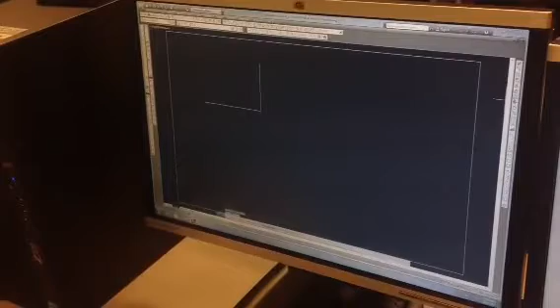Draw a line from here, ortho, 3.25. Then I'm going to draw a line up. I don't know how long it is, but I'm going to offset. What's the distance from one side to the other? 2.5.

Draw me a line from here to here. I can grip this one if I need to and pull it up and let it grip to the end point of that. Now, at the midpoint of this line, I've got a circle. I'm going to draw it in as a circle. It's really a radius.

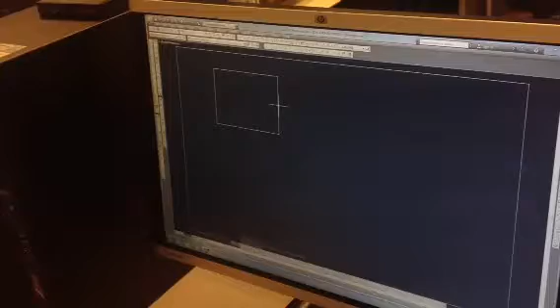Circle at the midpoint. Alright, that's my circle. Then I come over here and trim. Cut that off. I'm going to leave that in there because I might just convert that to a center line.

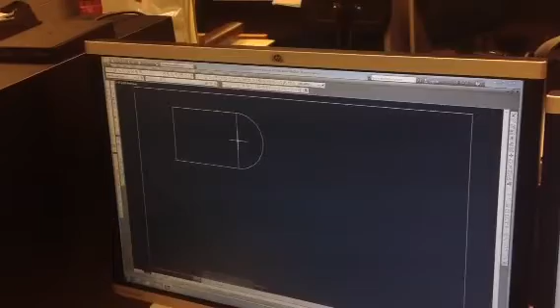Alright, now I'm going to come down here and draw some of my front view. So I'm going to draw me a line from here down. I'm going to go from the quadrant of this down. And I'm going to draw me a line just straight through here. Now, this is where my front view is going to be.

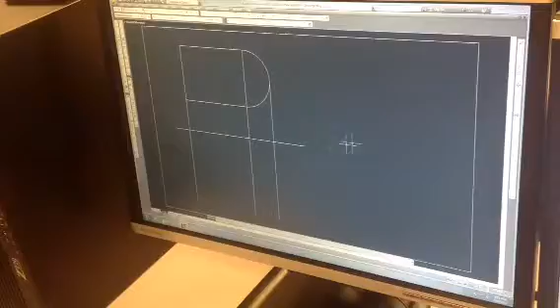And it's 1.75 high. So I'm going to offset 1.75. And then I'm going to trim. Get rid of that, and that.

Alright. Now let's see. I need a line from the top right here. How wide is that part right there? It's probably 0.5. If this little piece here is 0.5, that's probably 0.5. I'm going to offset 0.5.

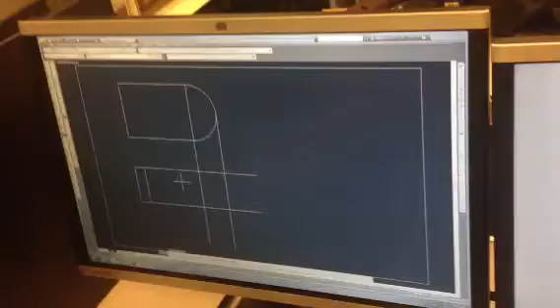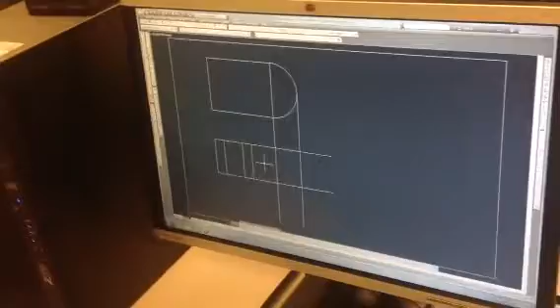And then, let's see. From this vertical line to this vertical line is 2 inches. So I'm going to come here and offset 2. Then I'm going to offset this back 0.5. Okay, it'll all fall into place. Now I'm going to offset the bottom line up 0.75 to get the bottom part of that.

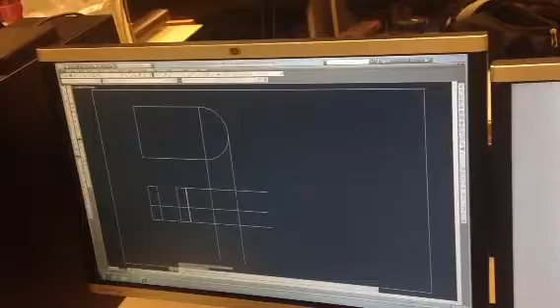Now I'm going to trim some. I need to get rid of this piece right here. I need to get rid of this piece. I need to get rid of this piece and this piece. And these two. Okay? That's that section right down there. That's what it's going to look like.

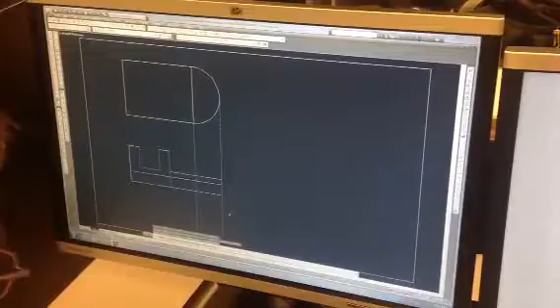Now this bottom, this end piece down here with the circle in it is only a 1/2 inch thick. So I'm going to offset 0.5. Then I'm going to come back and trim. I'll go ahead and get rid of that, and that, and that.

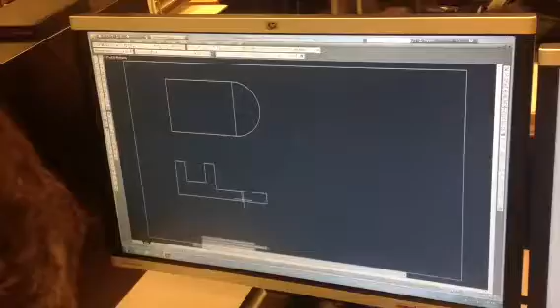Then erase this. Don't need that. And don't need that. Okay? Now I'm going to erase this. That's basically what the front view is going to look like.

Then you can come here, transfer these lines up, just drawing lines, trim, get rid of these and these.

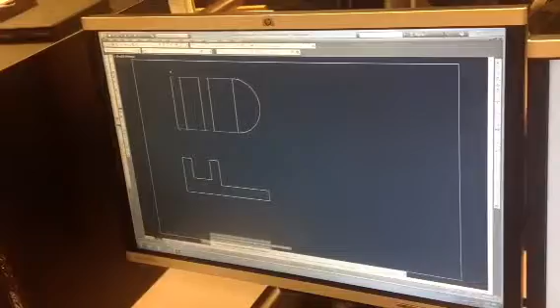Now, the width of this little piece here is 0.5, and then it's 1.5 inches. So I'm going to offset 0.5, and then 1.5, then start trimming again.

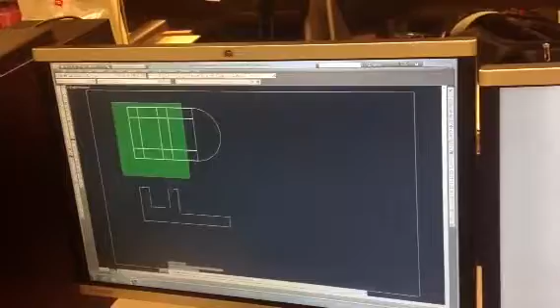Let's see, I don't need that or that. Got to have that, got to have that. Don't need that or that. Okay, that's basically what the top is going to look like.

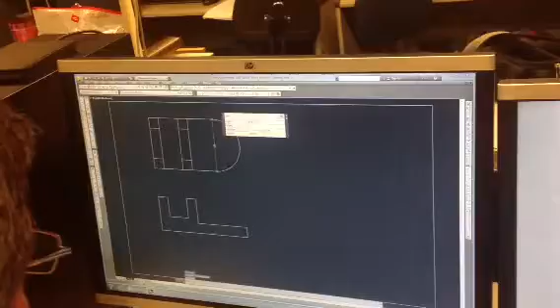I'm going to double click this and go ahead and make it a center line. Should be a center layer, right? Match properties. Well, no, that ain't what I want to do.

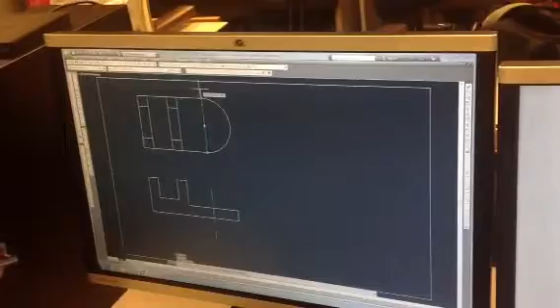I'm going to copy. I'm going to need a center line here. This center line's got to come outside, so I'm going to grip these and pull them out. I also need another center line that direction.

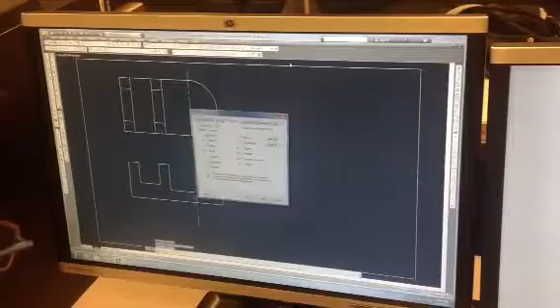Pull a line from the center. Alright, see, that's not snapping to center, is it? Type in O snap. Alright. End point I want, center is supposed to be there.

I don't want extension, I want intersection. Those are the ones I use. End point, probably midpoint, center, and intersection. And say okay. Now, I'm going to draw me a line from,

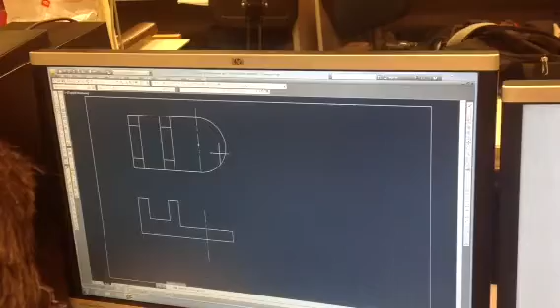well, it ain't going to jump to the center. I can make it jump to the center. Okay? I'm going to grip this. Match properties with this. Now I've got center lines.

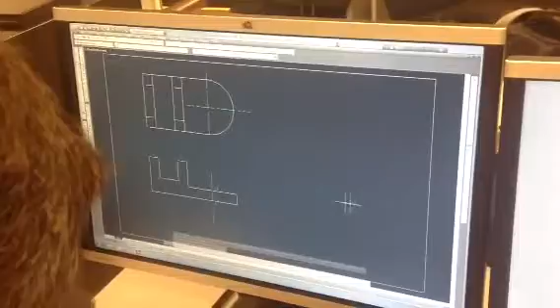Now, I got to get something over my right side view. So I can draw my lines, just transfer these over with lines. I need to get my width over here.

Alright, pay attention. I'm going to draw me a line from the bottom part of this view, and I'm going to start my right side view right along here and go this direction. So I'm going to draw me a line.

Alright, and where those two intersect, I'm going to draw me a line at 45. Shift 2, let's draw it about at an angle of 45 degrees.

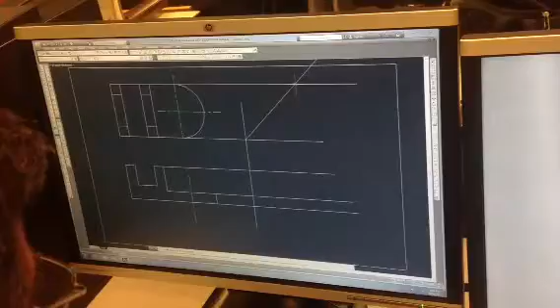Okay? Now I'm going to draw lines from here over and a line from here down. That's the width of my right side view. Okay? Just like that. You can draw me a line from here over, here. You go from this intersection down.

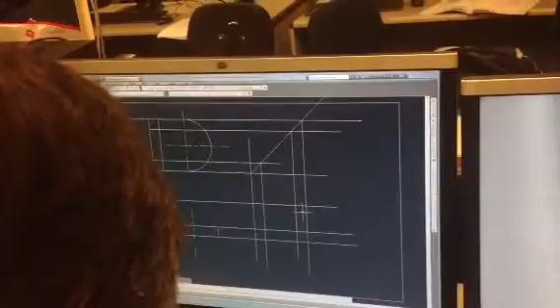Now the height of these pieces right here is the same height right here, so I'm going to trim, get rid of these. They won't go to the bottoms, so I can get rid of those. Get rid of that, and get rid of that.

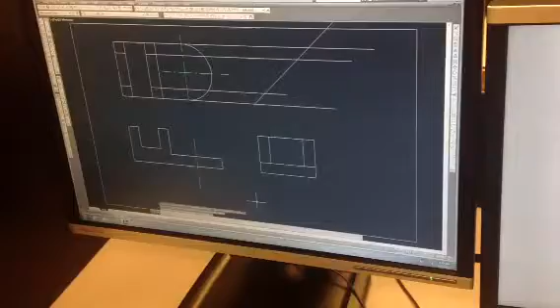Now, looking at it from the right side view, this piece sticks up. I'm going to trim from here and get rid of these. That line goes all the way across. Now, this little section in here in the middle, come over from here. And then trim from here and take this and this off.

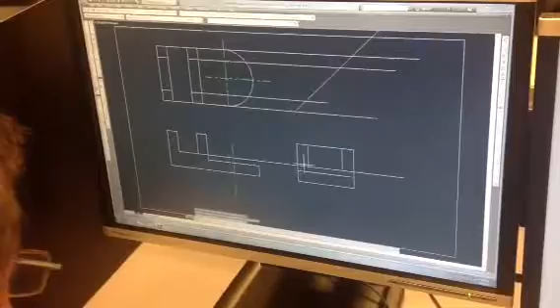Get rid of that. Get rid of that. Nothing in the middle, so take that out. I'm looking at it from the right side view now. That line goes all the way across. That comes over, over, over.

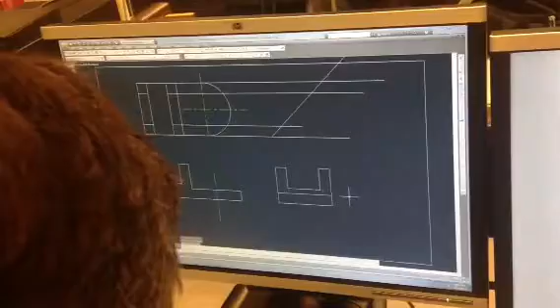Alright, this line right here is going to be what? There's a hidden line. That's at 0.5. If I draw a line from here over, there's a hidden line. Oh, wait a minute. Let's undo that. This piece right here is 0.75 from the top, so I'm going to offset 0.75.

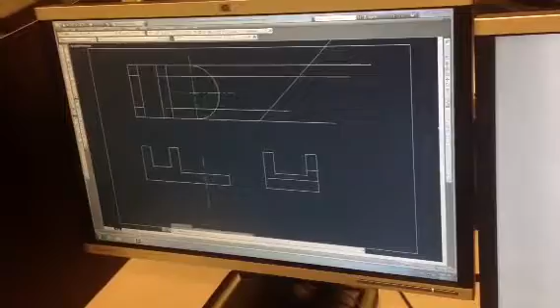This line is supposed to be up to here. All right, I'll show you a new command called stretch. Have I shown you stretch yet? It's right here, it says stretch. It says select objects to stretch by crossing window. All right, I've shown you crossing window and regular window. Whatever I want to stretch, I'm going to do a crossing window.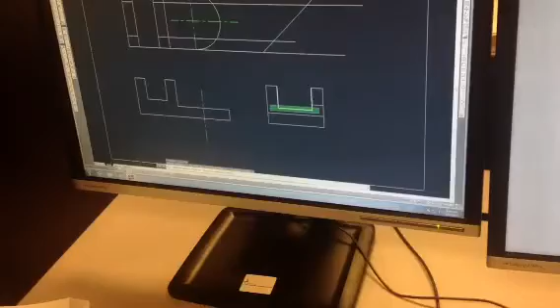And I'm going to go right through here. All right, whatever's completely inside that green square or rectangle, it's going to move. Whatever it actually cuts through, it's going to actually stretch. So it's going to stretch these two vertical lines, and this horizontal line is going to be moved.

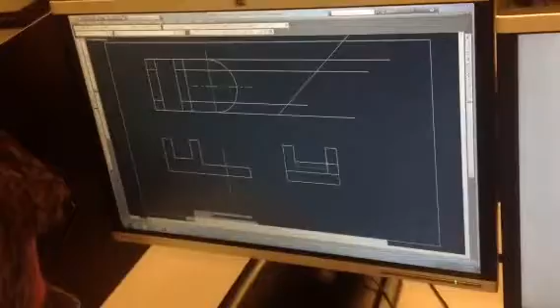All right, enter. Specify base point. All right, I want this line to be up even with this line, right? Base point here to here. Okay? Let me do that again over here.

Stretch. Crossing window. Whatever it crosses, it's going to stretch. Whatever's completely inside it, it's going to move. Enter. Base point. Just pick a point. See what it does? All right, do it again.

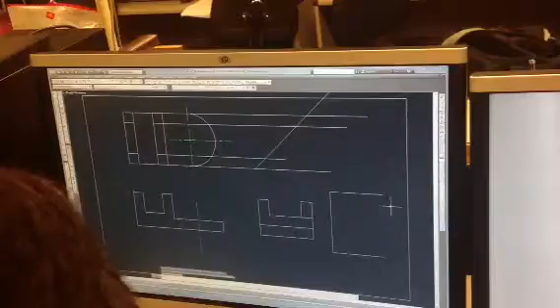Stretch this time. Let's say I just need this piece an inch wider. I'm going to cut through here. Space bar, pick a point. I want it 1 inch. I'm going to hit shift 2, 1 at an angle of, I want to go this way, 180 degrees. Okay?

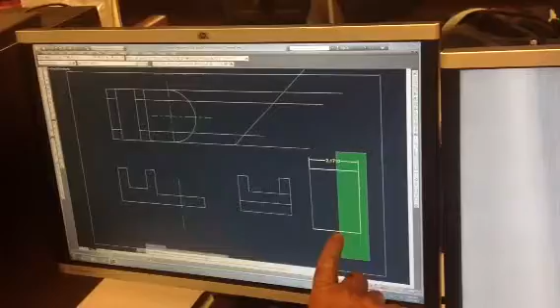Let's put a dimension on it. I'm going to stretch again, right through here. It's going to move this one, stretch this line, and the dimension. Let's say I want to stretch it from here, shift 2, 0.170 at an angle of 180. I missed it by a thousandth, sue me.

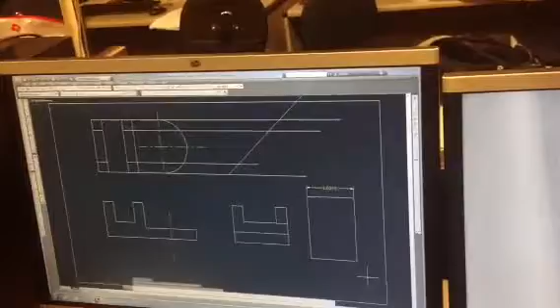Stretch here, shift 2, 0.001 at an angle of 180. Okay? That's stretch. Get used to using it because you'll need it.

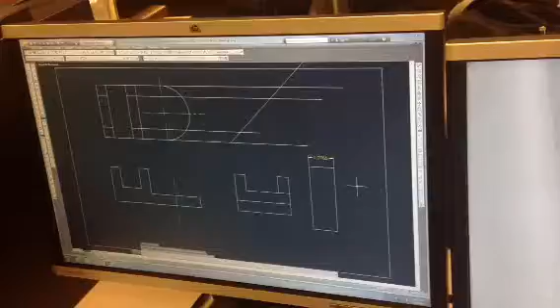You want to take this, convert it to front, top, and right side. I'd have been home trying to make that and catching hell. Does it show you anywhere up to this point how to do an isometric drawing? That's way on back here. Okay, any questions on that?

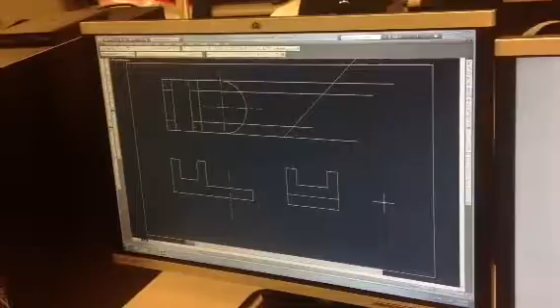Prototype drawing, how to set them up, project lines. Now let me show you how I got that line again. Wherever the top view is, come from the bottom of it. Wherever you want your right side view to start and go this direction, you come up from here. That intersection is where you draw your line at 45-degree angles.

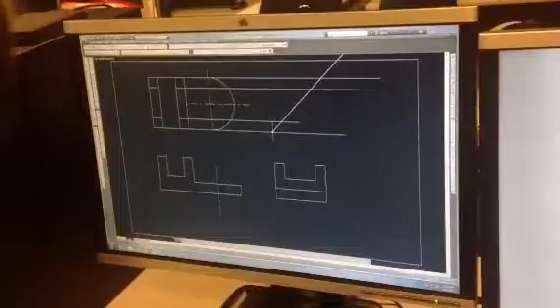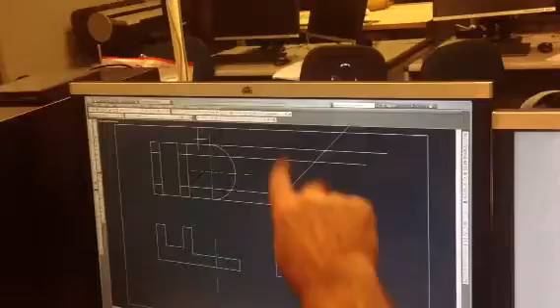So you just did a top side and back view? Front, top, and right side. Okay. But what's the 45-degree angle line for? So I can project. See, this piece right here, this width is the same as all the widths are in this view. So I project these over and down, and I don't have to measure anything in this view. I got you, all your heights in this view, you can transfer over to here. And that's the way you have to do some drawings. You might have to draw a little bit here, and then transfer back from view to view.

All righty, I can handle that. That's about enough for one day. I think so.